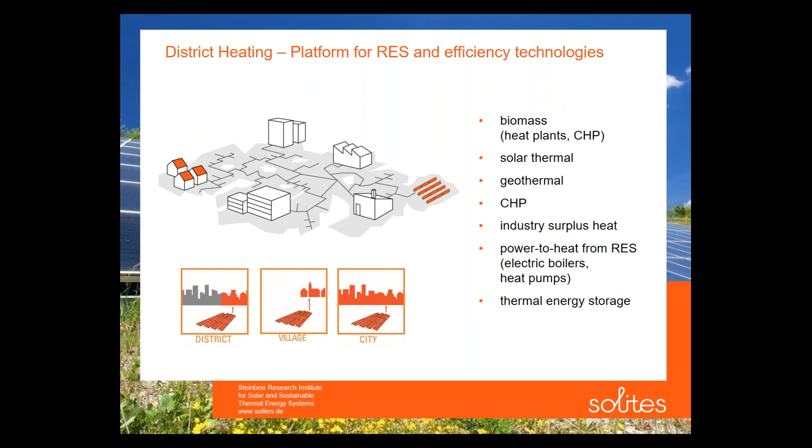Often district heating is connected to big towns, but I want to make you aware that district heating can also be seen as part of a district in a town, not the whole one, for example implementing solar district heating only in one part of the town. Or also a village. In Germany, we have had a few villages this year and the past years that have been introducing solar district heating, which is quite promising as well. And of course cities, but you could also think about larger building complexes, which could use large collector arrays which can then be connected to the district heating network. So there is a good range of possibilities of applying solar energy in connection to district heating networks.

With this picture, you have an example from Denmark, which might already be known. And there are some key points about solar district heating and cooling. The first one is, of course, it is emission-free, and even though you might have some energy for pumping, this is only a very minor part of the energy consumed, so it can be seen as 100% emission-free. It is also a mature and market-available technology. It's been developed since the 1980s, and since then a lot of plants have been built, as I will show you in a second. And it is available everywhere. From my point of view, Denmark is not the sunniest place in Europe, but still they are using it to quite a large extent. So I think that's one promising example of how successful solar district heating can be.

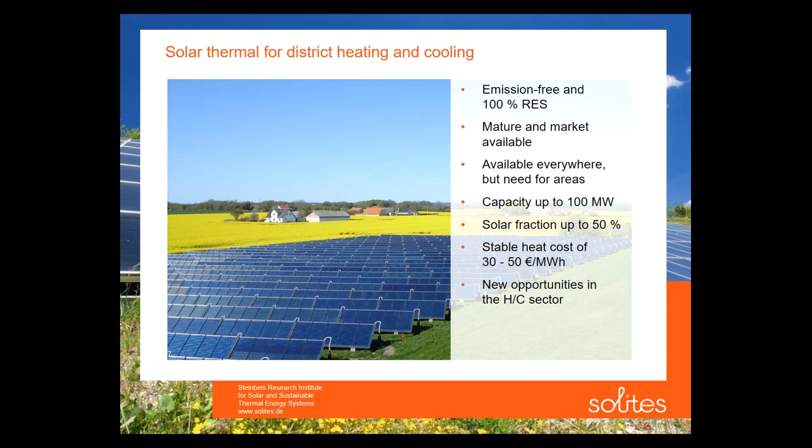And the capacity can be up to about 100 megawatts. So it's quite large, and it can supply towns or districts with solar fractions of up to about 50% with some seasonal storages. The costs are rather stable at 30 to 50 euros per megawatt hour. That of course depends also on the funding schemes in different countries, but due to the upfront investment, which can then be discounted over the coming years, it is a very stable and reliable energy source for district heating operators. And with renewables in general and district heating, there are new opportunities for how a district heating network can develop to be feasible in the future as well.

If we look now at Germany, you have the map of Germany with the different federal states and the plants which were in operation in the beginning of this year and the ones which are envisioned to be finished. If you compare it to the size of Denmark, for example, the plants in Germany are not that big, but it's a quite developing market, which is quite interesting to see.

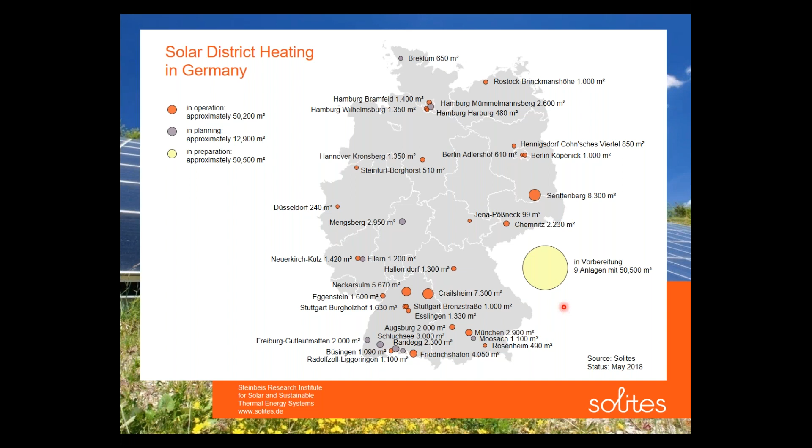Also for the coming years, we have a range of new upcoming projects, and it's quite interesting to listen to all the towns asking how it can be developed, how the planning takes place, and we are looking forward to having this yellow bubble of the plants in preparation increasing quite steadily.

This plant I'm talking about from 2013 is the plant of Büsingen. Büsingen is in the south of Germany, close to Lake Constance, and they have about 100 houses or 100 buildings which are heated, and about 1,000 square meters of collector area.

The district heating network was built at the same time as the solar heating plant, together with a biomass boiler. And the solar heating plant covers about 13% of the energy demand of the village. And the advantage is also that during the summertime, the collector field supplies the village completely. That means that the operators are flexible to do their maintenance on the biomass boiler.

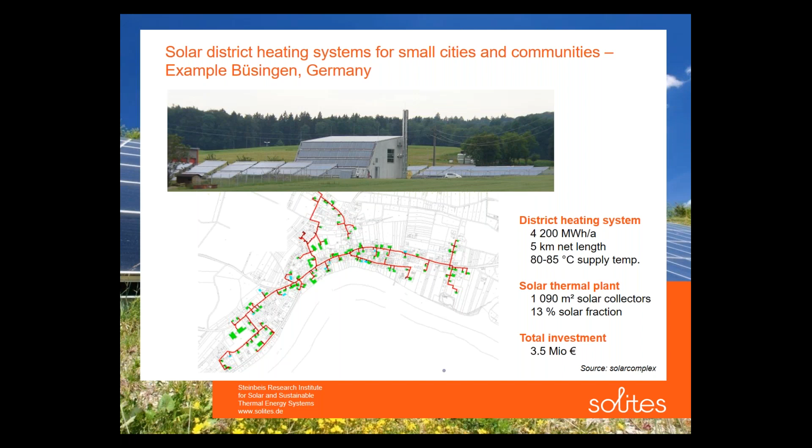When we look at the sector of villages, there are some quite interesting examples of different communities or stakeholders which use this technology. In Hallerndorf, for example, a green energy supplier is using it, whereas in Neuerkirch-Külz, two villages next to each other have decided to use the solar district heating plant together to supply both of the villages with renewable heat.

In Liggeringen, again close to Lake Constance, a local utility has decided to build such a plant. And in Mengsberg, in the center, it's a citizen cooperative which has been developing this plant. In the end, those plants are rather small, but it's a quite interesting way of developing the technology. And there are a lot of villages all over Germany which could apply the technology in a similar way.

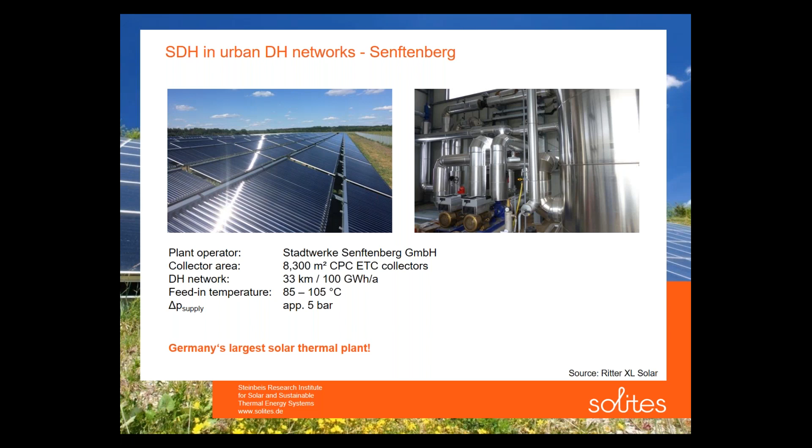Then in Berlin this year we had the first urban district heating plant in the capital of Germany, which has been built by Vattenfall. It has a collector area of about 1,000 square meters of flat plate collectors, and it's quite interesting because in Berlin the decision was to divest from coal usage by 2030, which means that by 2030 they will have to supply about 600 gigawatt hours of heat in a different way in the future.

So Vattenfall and the Senate of Berlin are performing a study to find suitable areas where solar district heating could be applied on a larger scale. Just to remind you of the numbers, earlier I said we have more than 600 gigawatt hours of solar heat all over Europe, which is supplied currently. And now we're talking about Berlin, which needs to produce 600 gigawatt hours of heat in the future from energy sources other than coal. So it's quite a large scale of energy they need.

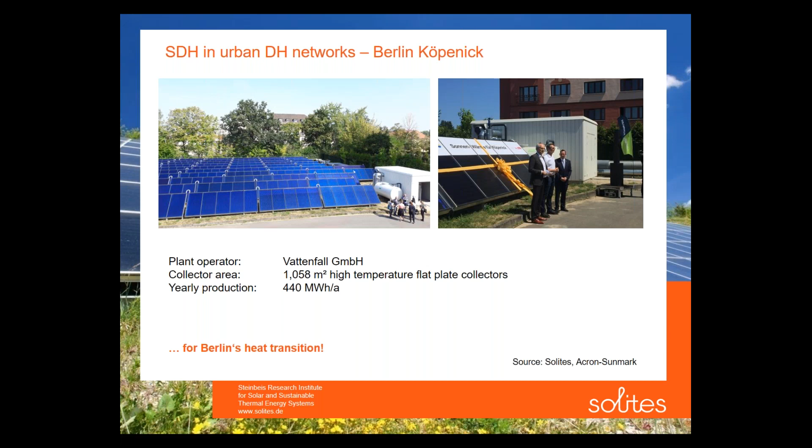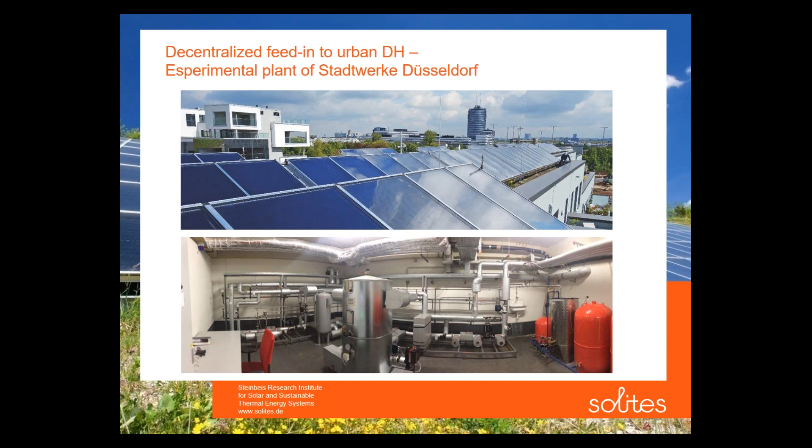Switching now from the big towns to another system, which is decentralized feed-in in urban areas. This example is from Düsseldorf. There they've got a plant on a building complex, and in a research project they're evaluating how the feed-in process for the surplus heat from the building complex can be used for the district heating system. In Berlin Adlershof, they are trying out a similar concept with 5 different buildings, where 2 buildings use solar thermal collectors and also feed the surplus heat into the district heating grid.

When we look at Germany, currently we have the project Solnet 4.0, which is a quite interesting project because on the one hand we work together with collector producers, but on the other hand we have a journalist and the project group from Energiekommune, which tries to push the project to the audience, to the public, to have more dissemination for everyone and to explain the subject better, to have more plants in the future.

And furthermore, this year we've also developed the webpage of solar district heating, which can be interesting for all of you when it comes to the news. We have different languages from all the partners of the SDHp2m project. We have the news, market studies, a plant database, and a lot of guidelines which have also been developed within the project. So I want to encourage you to have a look at the recent deliverables within this project, which are quite interesting and promising for everyone, I think.

And yes, finally, this was about solar district heating in Germany. Thank you for your attention.

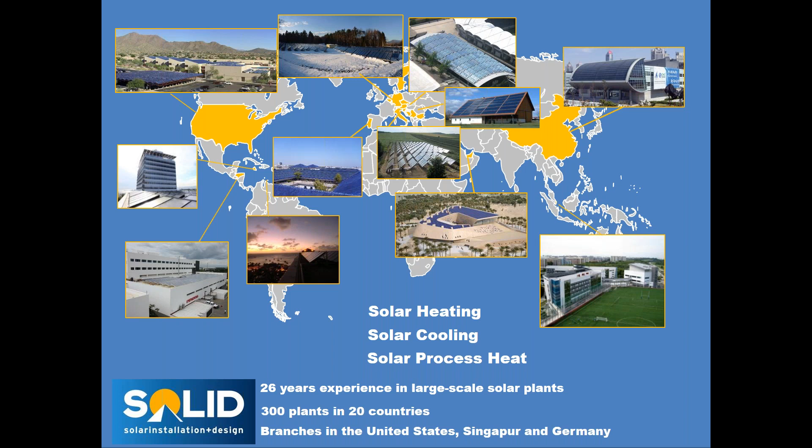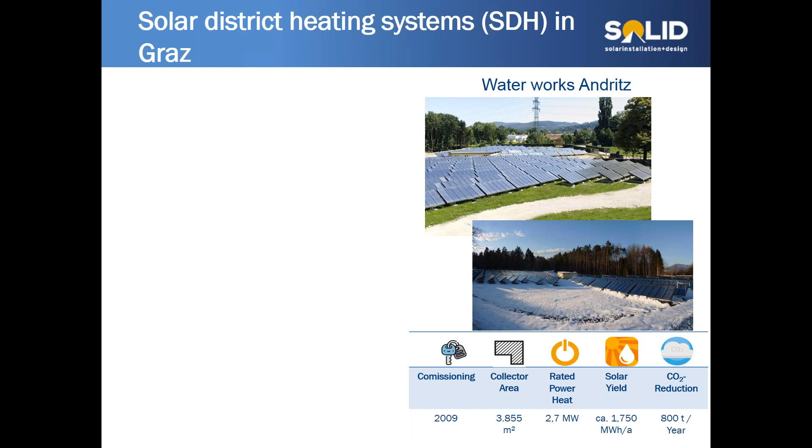We started 15 years ago with solar district heating in Graz. Here I show you two of the bigger plants we have in Graz. One was commissioned around 10 years ago with 4,000 square meters of collector area, supplying the city with district heating, and another even bigger one at the power plant and the recycling plant with around 6 megawatts of thermal power, also supplying the city. Graz district heating has around 1,200 gigawatt hours per year of heat supply.

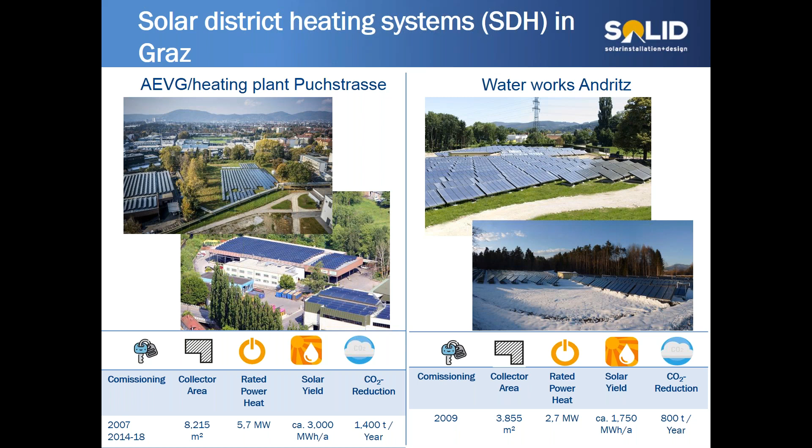What came up in Graz 5 years ago was that the national utility planned to shut down the major plant which supplies Graz with district heating. So the city urgently needed to look for other sources of heat supply, and this was not only the case in Graz; in other cities too, fossil power plants shut down and other heat supply needed to be found. For example, in Hamburg, where they have quite ambitious plans, or, like Carlo said, in Berlin.

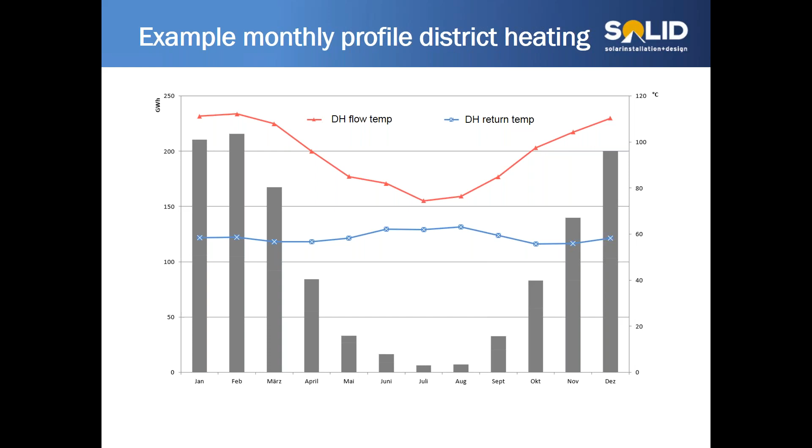In Graz, we had a feasibility study to look at how we can have high solar shares in district heating. The big bars show the energy demand, the blue line is the return temperature, and the red line the flow temperature of the district heating over the year. Conventional solar district heating without seasonal storage gives good solar shares mainly from June to September, but not in the rest of the year. If you want to supply heat between October and May at significant scale, you have to go for solar district heating including heat storage, what we call big solar.

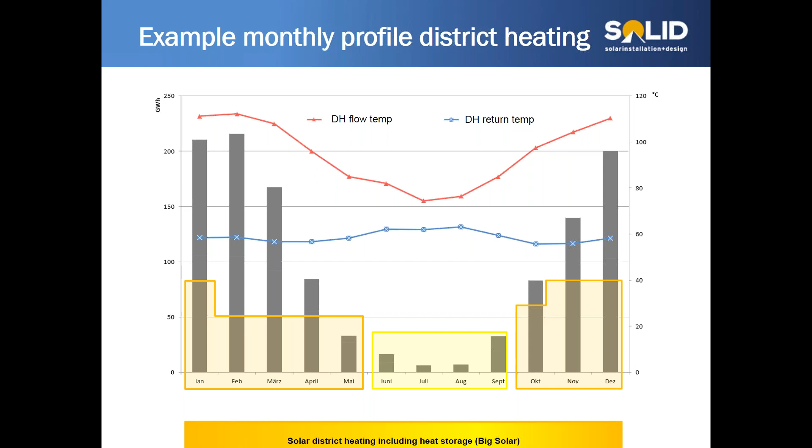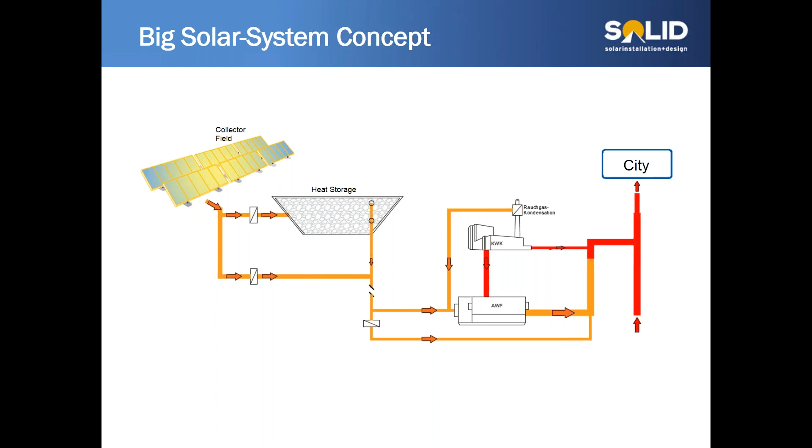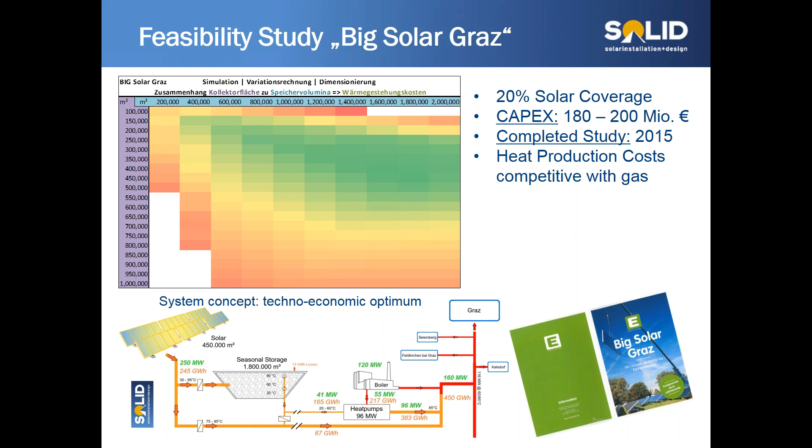Here we work together with the Danish consultancy PlanEnergi, who's also in the SDHp2m project. They found that a technical-economical optimum for Graz is a solar plant of 450,000 square meters and a seasonal storage of 1.8 million cubic meters. That is the green area at the top right, where you have the lowest heat production costs. For this you have to invest between 180 and 200 million euros before subsidies.

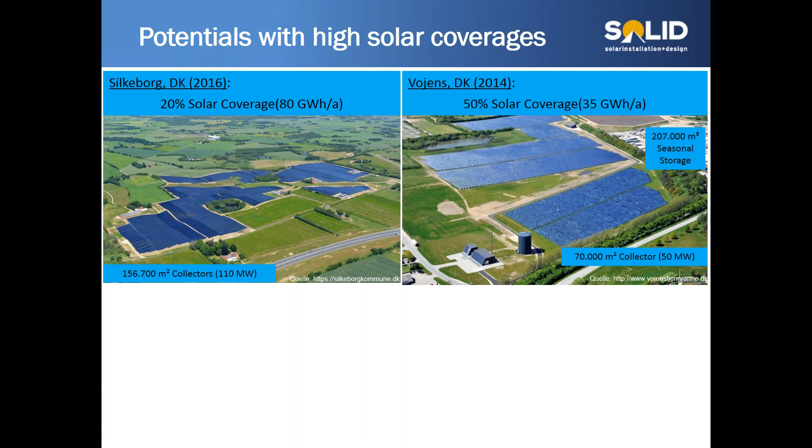These are other big plants which are already realized, so it's not completely new; what we are planning in Graz is just adapted to a bigger grid. This is another community in Denmark. They even reach 50% solar coverage because they have lower grid temperatures and a different distribution of heat demand over the year compared to Graz. And in Canada, they even reached 90% already.

So what is relevant when you want to implement such a big system? So of course, the temperatures of the district heating network are very important, that they are as low as possible. 50 is good, 45 or 40 is even better, but that's very difficult in an existing grid, for example, in Austria, also in most other towns out of Scandinavia.

So it's a competitive heating supply from this big solar. You have comparable economics to coal and natural gas, also to biomass and to waste heat from combined heat and power.

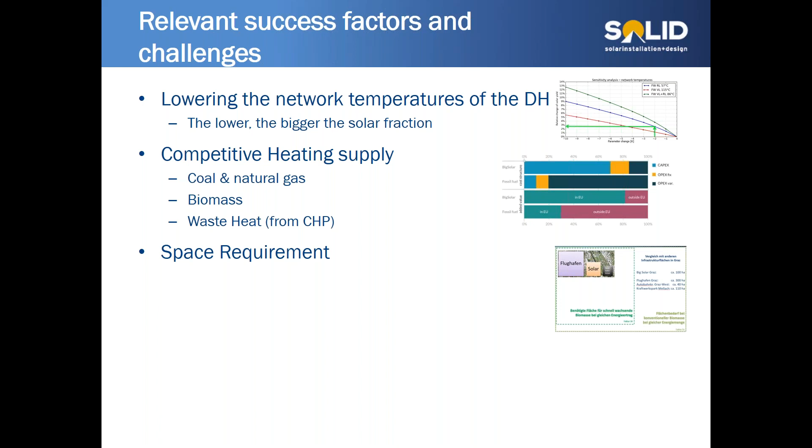The space requirement is quite significant. So, for example, for the Graz plant, you need around 100 hectares to implement it. But normally out of the cities in a few kilometers distance, there are always some areas which can't be used for housing or anything else. Maybe on an old landfill, what we saw from Senftenberg, or water protection area where you can't build houses, but you can build a solar plant. So here it's definitely not so easy. Karina will also show us some issues about this, but it's always taken into account.

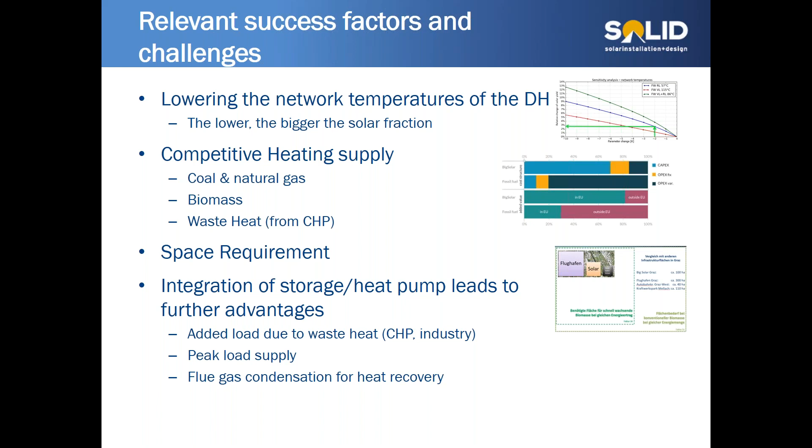So when you integrate the storage and the heat pump to a district heating grid, you also have further advantages, that you have added load due to waste heat, for example, from CHP or industry. You can contribute to peak load, and you can operate a flue gas condensation for heat recovery with the heat pump.

Then we had a look how you can apply this big solar concept to which communities in Europe. So we made an estimation that you need a heating grid of about 30 gigawatt hours per year. That's a city of more or less 8,000 inhabitants. So compared to most of the biomass solutions that we know, for example, in Austria, it's a rather bigger grid. Many of the biomass solutions are in the range between 2 and 10 gigawatt hours per year.

And the whole district heating consumption in Europe is around 600 terawatt hours per year. And this is what we took for our estimations about what solar district heating can contribute to the heat supply in Europe. So assuming that there's also future district heating development foreseen beyond the 600 terawatt, probably 200 to 300 terawatt hours per year of solar thermal are possible. And this corresponds to very big numbers, to 400 million square meters of solar thermal collectors. So that's 8 times the installed collector area what we have at the moment.

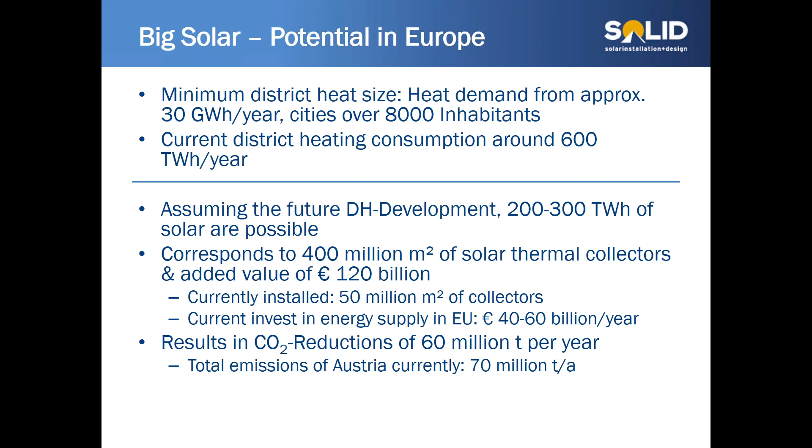So SOLID is working on this topic in different feasibility studies and research projects, for example, on storages and on controls and on system design for the whole city. So I go over this briefly because Karina will soon have the microphone.

And yes, what can be said is that large-scale solar plants deliver reliable low heat prices due to economies of scale. Because for a big solar field, you only need one pump, one heat exchanger, or several pumps and heat exchangers, but not so many per square meter as for a small plant. And they can have a significant contribution to the decarbonization of district heating. And the solar technology, you can say, is mature in the megawatt range, and it's ready for rollout. So it's very good to have all these measures in the SDHp2m project to make it actually happen.

Thank you. That was my contribution. Now I hand over the microphone to Karina. So thank you very much, Moritz. Moritz will have to leave soon. So if there are questions for Moritz, please write them down now. Otherwise, I'll hand over to Karina to complete the presentation about Austria. Thank you. Okay, thanks, Alessandro, for the introduction.

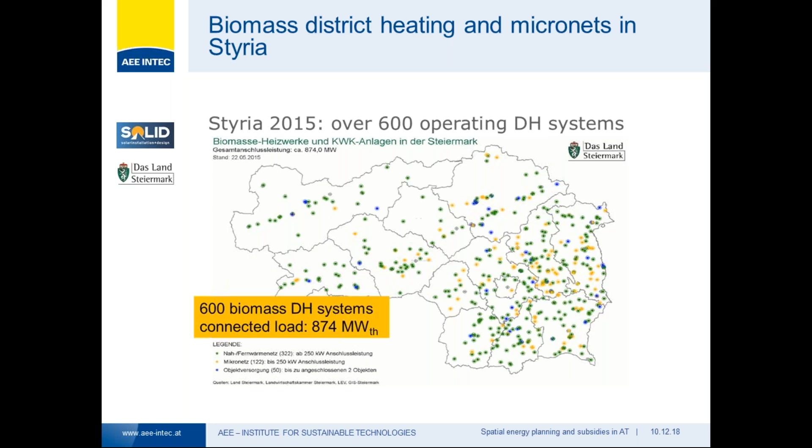And now we have some current initiatives of spatial energy planning in Styria. Therefore, we have in the Styrian government a department, it's called Spatial Planning, and it's doing the legislative work for spatial energy planning. And they worked out a concept for the area for energy, and they have some important topics

they are working on. On the one hand are the political goals for energy and the climate. Therefore, they develop energy efficient and resource saving structures, or they are working on installations of favorable preconditions for the use of renewables. The second part are some analyses of the existing situations and the future potentials.

Therefore, they focus in different projects to generate energy relevant structural data, or to make an opening balance for every community. I will come later to that, and to do some analysis of future potentials concerning the energy efficiency or possible substitutions with renewables.

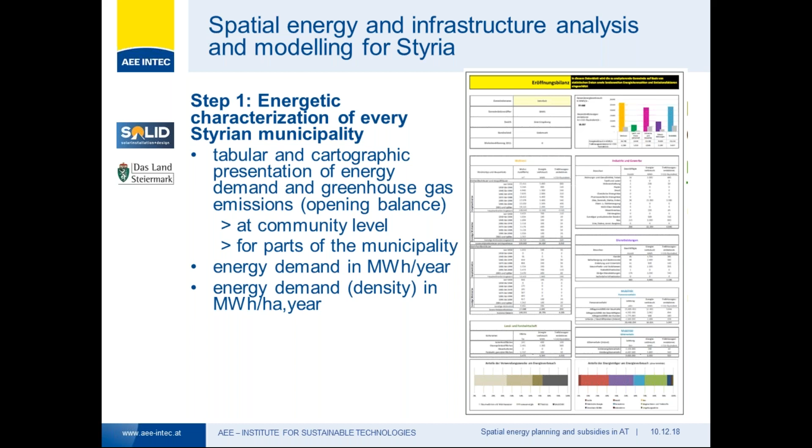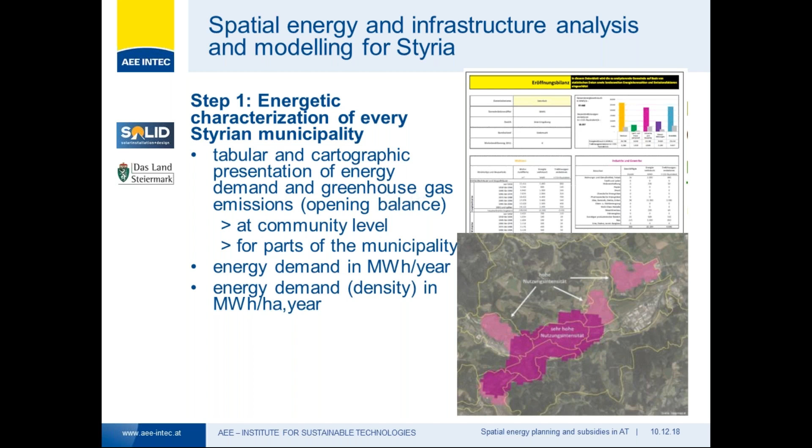The second step in the approach was to get the detailed analysis of regional building stock and the district heating. And therefore, we analyzed to get information about the building use category, the building age, the building's heating system, and also the space heating demand of each building.

And the next step was the development of a regional heat density map with this data. So on the one hand, with the status quo refurbishment standard, and on the second part, to get some different renovation scenarios. For example, a scenario for 2050, where you have a reduction of the space heating demand up to 60%, or one ambitious scenario where you have a reduction of space heating demand of around 70%.

And the picture shows an example of a heat density map for the region of Gleisdorf. It's one community in Styria, and it shows the current situation.

The next step is to get the priority areas for district heating. So you have to compare the current heat density with the forecasted heat density of the region, to provide some strategies for district heating and some extension plans. And these heat density maps have some hotspots, and so you can make expansion stages and the expansion plan for the priority areas.

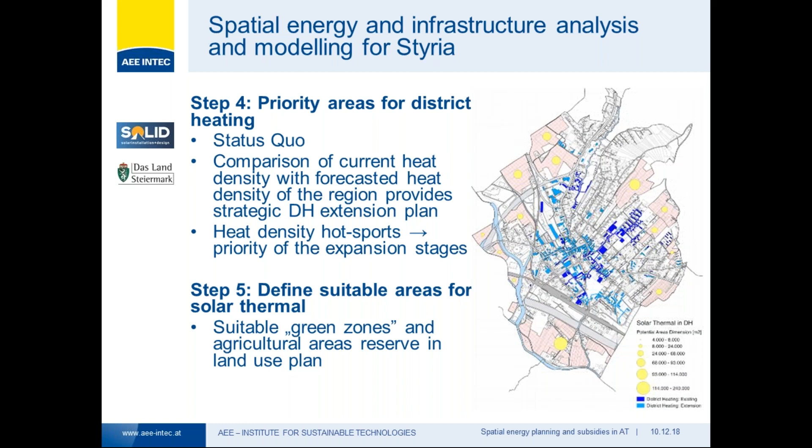So another topic beside this energy planning are some subsidies, because they are very important on the one hand to support these high investments and also to support the district heating operators. So I will show you one national subsidy in Austria. It's called Large Solar Thermal Systems.

And this subsidy has two parts. On the one hand, it is an investment subsidy up to 45%. And the second part, it's supporting scientific research. So it helps the district heating operators during the implementation period, and also during the running period they get support from experts and a monitoring.

And this subsidy program started first in 2010, and now we have the 9th call in 2018. The subsidized collector area ranges from 100 square meters to 10,000 square meters, and you can apply in 5 different fields. And one field is especially for solar district heating. And these applications for the subsidy program also need a professional consultation, that's mandatory, and it's for the planning stage.

For example, these are the subsidized projects from 2010 to 2016, and that's about 261 projects with a total collector area of 93,000. And around 20% of them have submitted a collector over 500 square meters, and only 84 were selected for the monitoring and the scientific support.

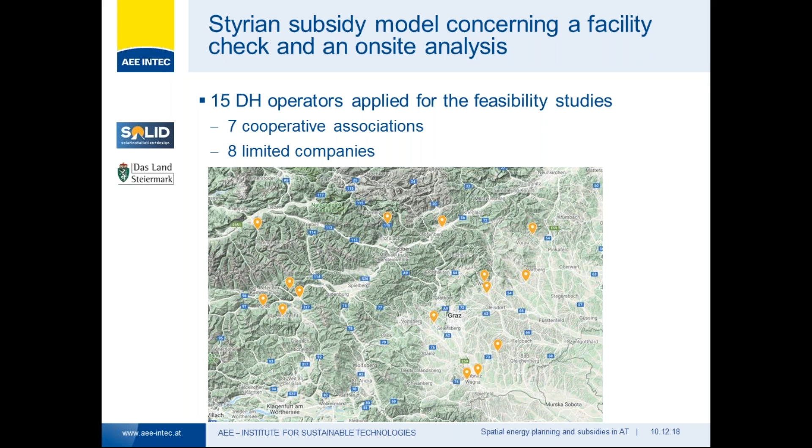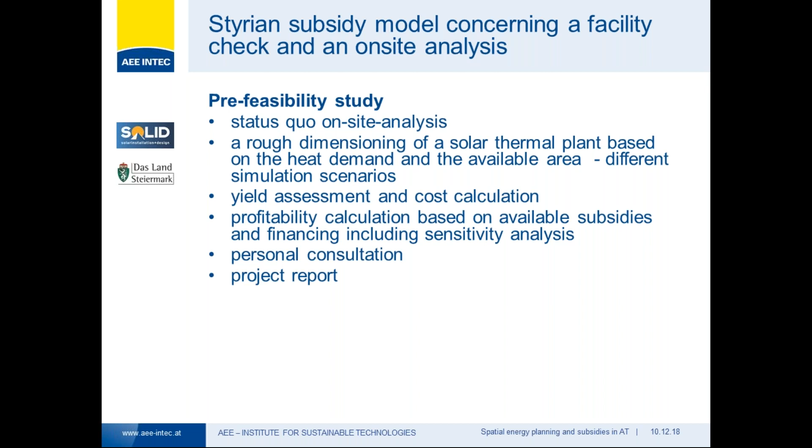And this feasibility study includes a status quo on-site analysis, a rough dimensioning of the solar thermal plants with some different simulation scenarios, then the yield assessment and the cost calculation of the solar thermal plants, also a profitability calculation based on the available subsidies and financing possibilities, and also a sensitivity analysis. And finally, they get the personal consultation and a written project report.

So to sum up our results in the Austrian region, we can say that spatial energy planning also supports investors and decision makers to build up new district heating networks or expand district heating networks, or also try to integrate solar thermal plants. Then the Austrian funding program stimulates the market for commercial large-scale solar thermal applications. And also the Styrian cost-free consultancy on integration of solar thermal plants supports the knowledge about the practical steps towards the implementation. So thank you for the attention.

Thank you very much, Karina. I think it was very inspiring to see that Styria is doing actually quite a lot on solar district heating. May I ask you if you know if other regions in Austria are also as active as Styria, or do you plan to show the best practices of Styria to other regions in Austria in order to spread the word and spread the solar district heating experience?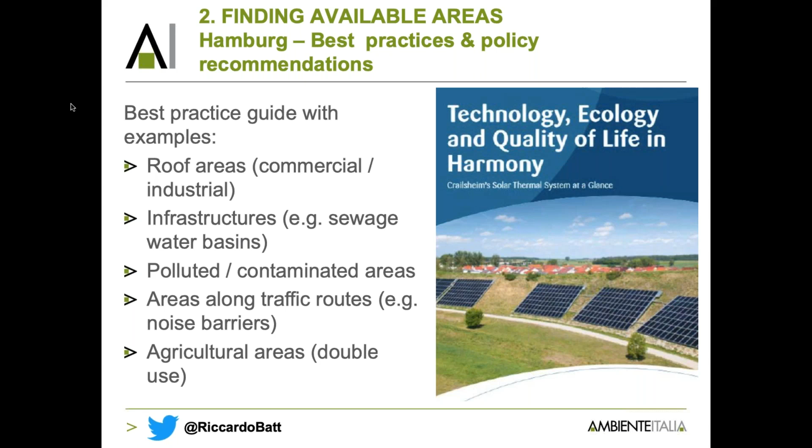Most of us maybe are familiar with PV solutions along traffic routes, so PV noise barriers, but of course this can be done, and this has already been done also with solar thermal, so it's important to keep it in mind. And of course also agricultural areas. So of course in this guide you can find also a lot of pictures. Some of these plants have been realized, some of them are just renderings, let's say.

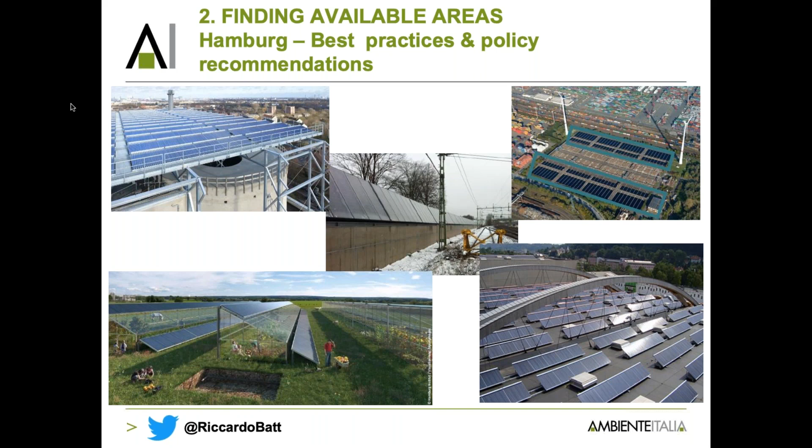So you see, for instance, on the bottom left, this possible double use of agricultural land, where even though you installed solar thermal collectors, you can still grow vegetables in a kind of solar greenhouse.

Also, of course, the Hamburg Institute developed, together with this best practice guide, policy recommendations on how to facilitate the implementation, so how to facilitate the use of this area. For instance, regarding commercial roofs, you can have building codes obliging developers of these buildings to allow the future use of solar heat. This has been done in a lot of building codes in cities, for instance, regarding residential applications. But maybe for commercial it is quite an innovative solution.

Then regarding the use of contaminated areas, of course, you can ask for simplification of the legal procedures. While I think this was also shown already by Karina, a very practical example. So you have regional development plans. There are some, let's say, second-level agricultural areas that are close to the district heating networks, so the heat losses are not that high, and you can secure this land for the future use of solar district heating. And as Karina already showed in detail, Styria in Austria is working on spatial planning on this specific topic. Then I go to the third barrier, which is knowledge and awareness.

So how to overcome this lack of knowledge and awareness. From a technical point of view, I think this is a very nice example, again, from Thuringia, Germany. They developed a web-based tool, which is called Solar Calculator. And you can use this tool. You see, you have a map. You can draw an area, which could be both on the roof or on the ground. And then you have an estimation of the yield, so of the energy produced over one year from this plant, either photovoltaic or solar thermal, and you can also have a sort of simplified economic calculation.

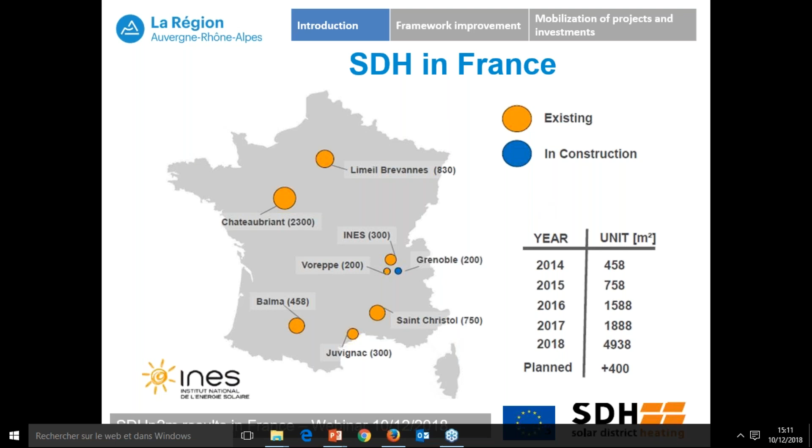But the main point about SDH projects, you'll see in the barriers, is that it's difficult at the moment to develop really big size projects. And just a short word about the biggest one in France, which is Chateaubriand. I just wanted to show you a little picture of that because it's interesting to see that to be able to develop this size of project, the attention has been focused on finding a good area to put the panels, and the panels were installed on a specific area where no other construction was possible because it was a flooding area with some risk of flooding, and that's why they decided to use this specific area to put solar panels.

And there have been some adaptations of the structures; it's a bit higher just to avoid the panels being in the water. But I think it's really a nice project to see that even if it can be difficult to find suitable areas to develop projects, you can find innovative solutions to develop projects. So that's the main point. So as I said, it's 2,300 square meters with double glazed flat panels, and you've got a little bit of storage. You can see on the right pictures, you've got 3 storage tanks. What's interesting is that you've got a cover rate of 8%, and it's a network working with wood cogeneration gas. So it's a nice project, and we hope that we will have similar projects in the region soon.

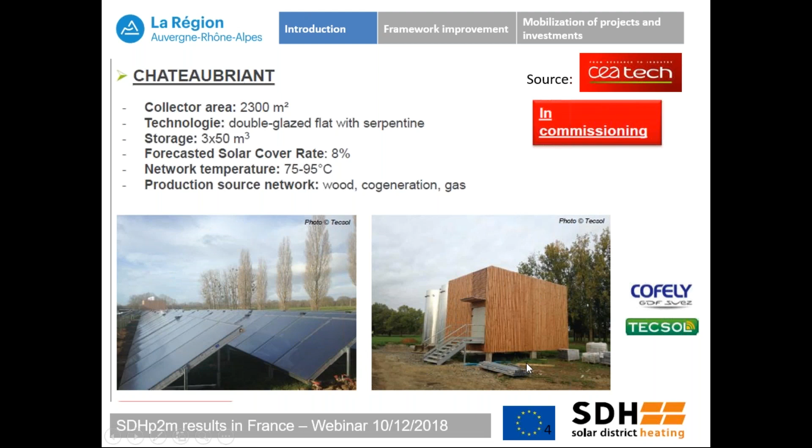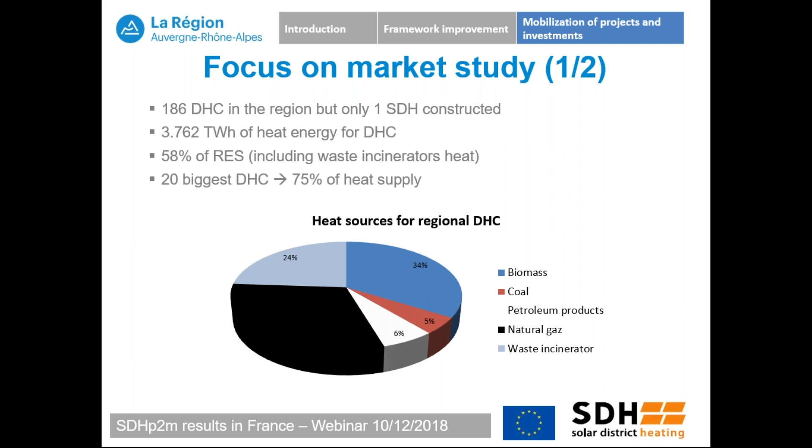And what we can see is that the 20 biggest DHC are 75% of heat supply. So we see that we've got quite a lot of DHC, so quite a huge potential, but we could not say if it's really feasible on all these DHC or only on a part of them. And that's why we made a really simple scenario.

And the scenario was to say, well, we want to integrate solar thermal in those grids, and we take 3 pessimistic hypotheses, which were no solar thermal integration in DHC with waste incinerator heat, replacement of fossil energy only, no biomass substitution, and no more than 15% of solar thermal in the global district heating energy mix.

And what's really interesting is that the results were that 132 DHC out of 186 can integrate a part of solar thermal energy. So it's 70%. And we can see that we had pessimistic hypotheses and 70% of DHC can integrate. And it will be more than 500,000 square meters of panels. So it's really a nice opportunity to go.

And we see that we have a real potential on small biomass to remove fossil fuel energy during the summer. And I think it's simple to replicate in other cities or regions. If you've got a good knowledge of your DHC, you can simply identify where you can go and what will be your aim. And finally, I just want to focus on a point we made on regional cases, but I'm going to be quick. I spent a bit more time than expected.